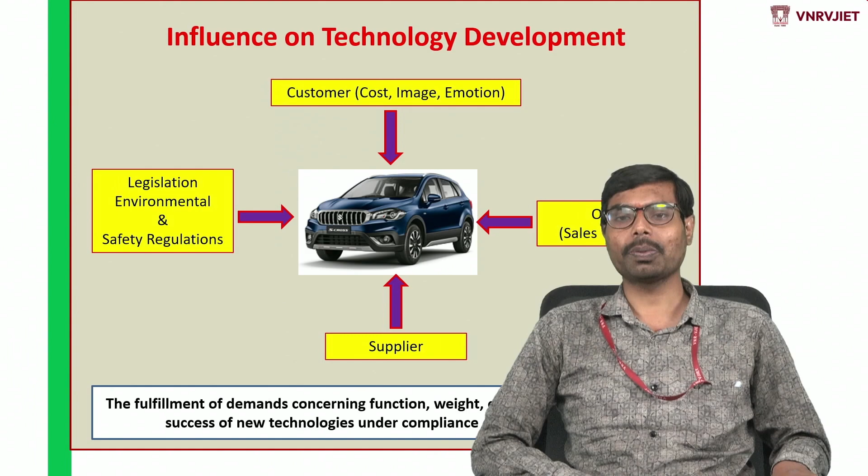So in the last session, we discussed the topic Introduction to Modern Automotive Technologies, where I covered why we need advanced technology, or what is the need for the adoption of technology into the vehicle, and what are the parameters driving the incorporation of technology into the

vehicle. So as we discussed, the basic parameters are drivetrain technology, chassis technology, interior technology, and body technology, the places where we can improve or adopt technology for better comfort, as well as safety, as well as to meet government regulations. These are the driving factors which force technology development.

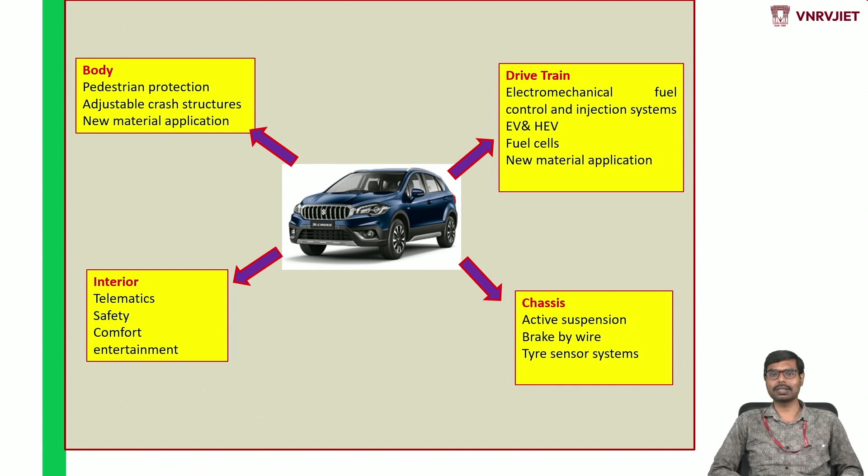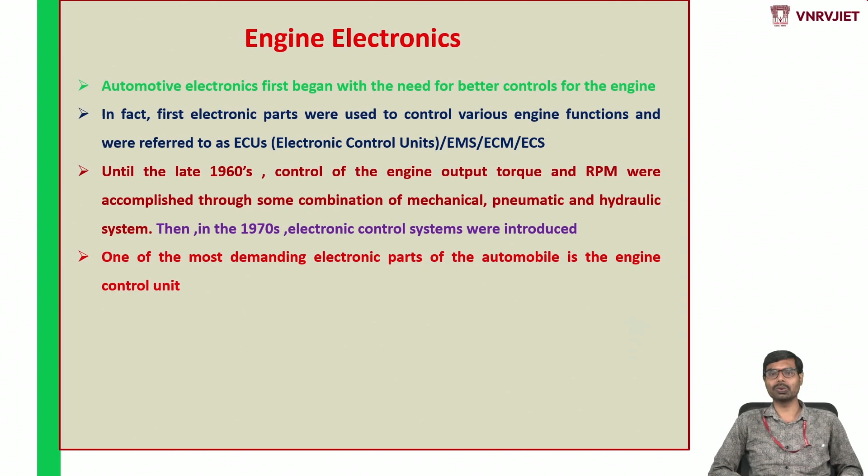Based on that, we identified the four places, that is drivetrain, chassis, interior, and body, where technology adoption was discussed elaborately in the last class. And we also gave some introduction about engine electronics, what is open loop, what is closed loop, what is the percentage of these electronic components inside the vehicle, and what is the cost associated with that.

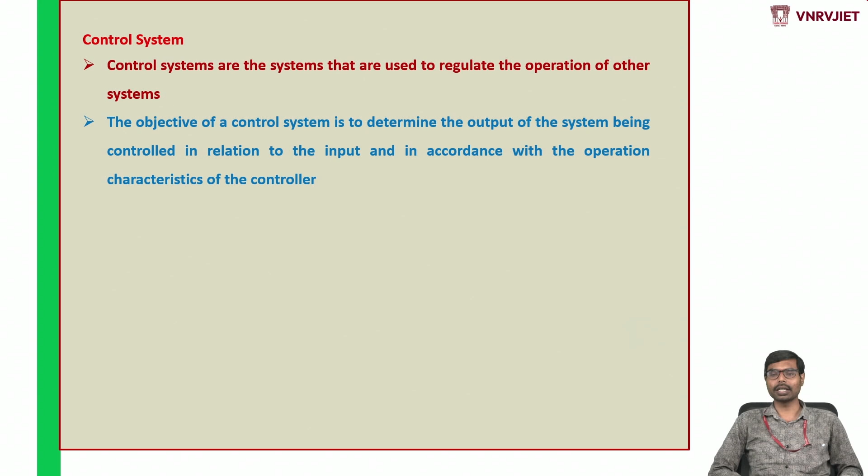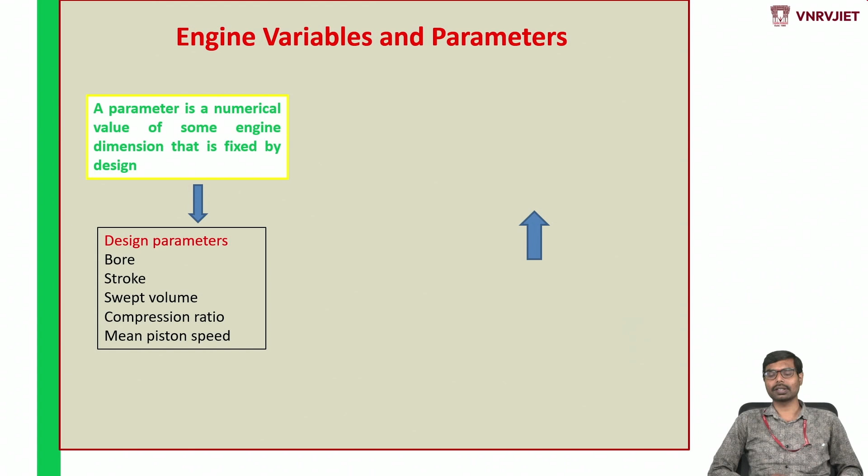So those parts we covered in the last session, and in today's session we are going to discuss some of the important things related to the SI engine management system, that is the spark ignition engine management system. So these are the overview we covered, what are the engine variables and parameters. With the help of electronic engine control, we are able to change the variables, not the parameters. The parameters are fixed during the engine design itself.

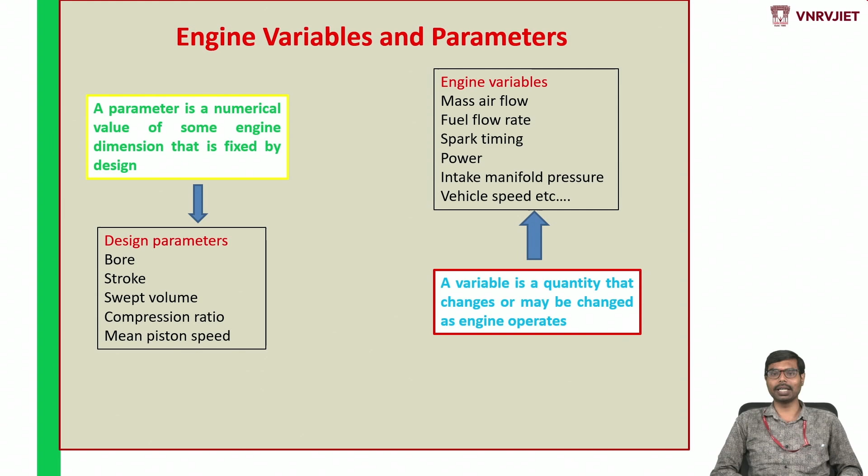These variables we control through inputs and outputs; in relation to the outputs we can control the inputs, so that we get maximum fuel economy and minimum emissions. That part we discussed in the last session. So in today's session, we are going to discuss the engine management system. We also gave some introduction to the basic purpose of the engine

management system. It is basically responsible for controlling the amount of fuel being injected and for adjusting the engine ignition timing. This is the basic purpose and motto of introducing the engine management system inside a vehicle. So the basic intention is that once we control the fuel amount optimally, it ensures minimum emissions and maximum fuel economy.

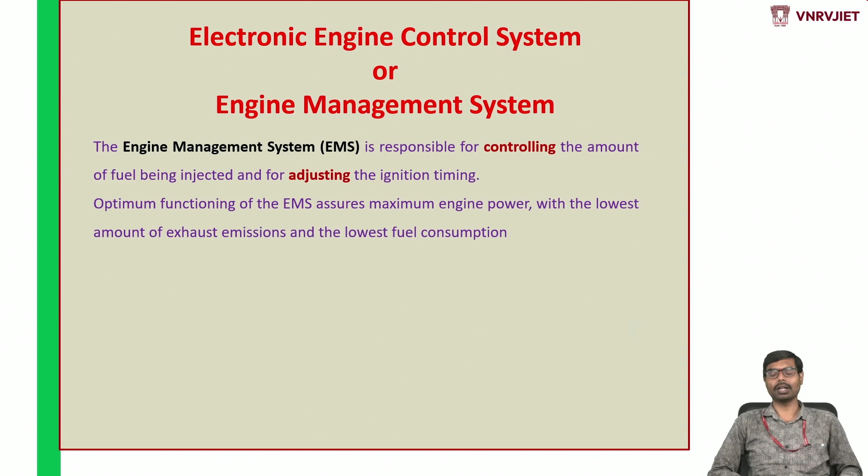That's why the optimum functioning of EMS ensures maximum engine power with the lowest exhaust gas emissions and lowest fuel consumption. In order to get this objective, we are introducing the engine management system. The two functions we discussed in the last class are the role of the engine management system, and these are the parts.

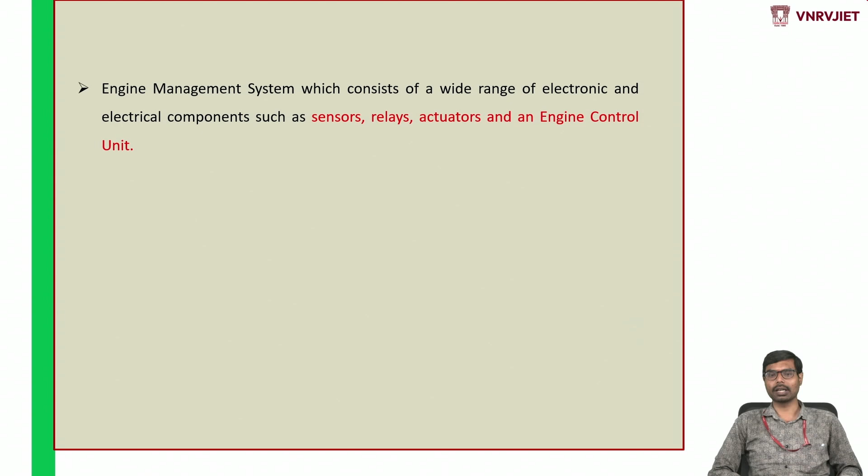An engine management system is divided into three categories, that is the input section, the control unit section, and the output section. The input section is basically the sensors; there are various types of sensors depending upon the kind of system we are dealing with, where a sufficient number of inputs are needed for analysis in the control unit.

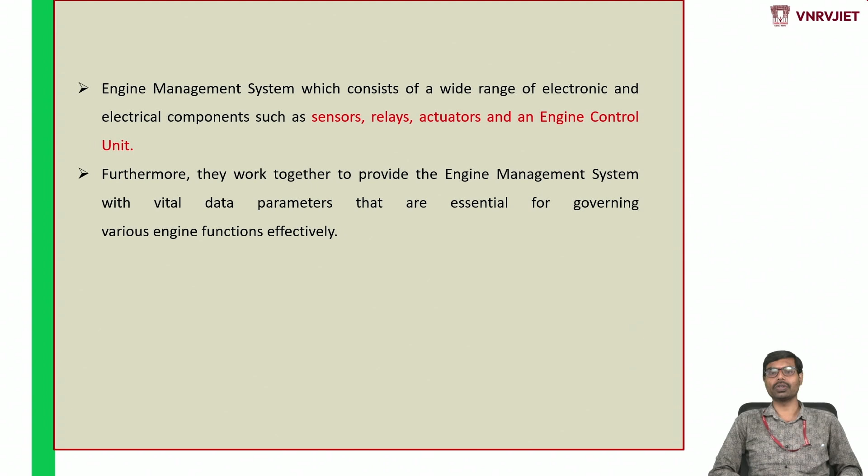The control unit is basically the brain of this control system, that is the engine electronic control unit. Based on these input parameters, the output is regulated; for whatever output we need, we monitor the inputs, so that we get an input-output relation that drives maximum fuel economy and minimum emissions, taking an engine as an example.

Okay. So the different engine management systems are MPFI, that is the multi-point fuel injection system, the gasoline direct injection system, and the CRDI system. These are the most common technologies available in the current market. These systems are developed to achieve maximum fuel economy, minimum emissions, and maximum power output. In order to achieve these three things, we adopted these three technologies.

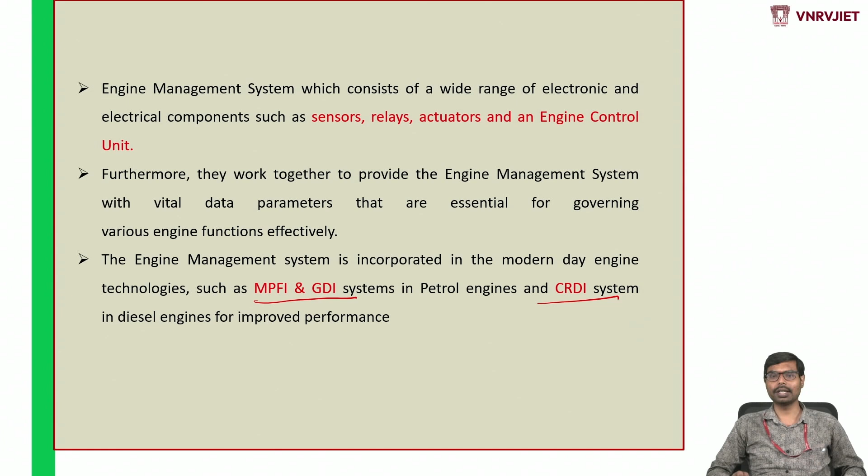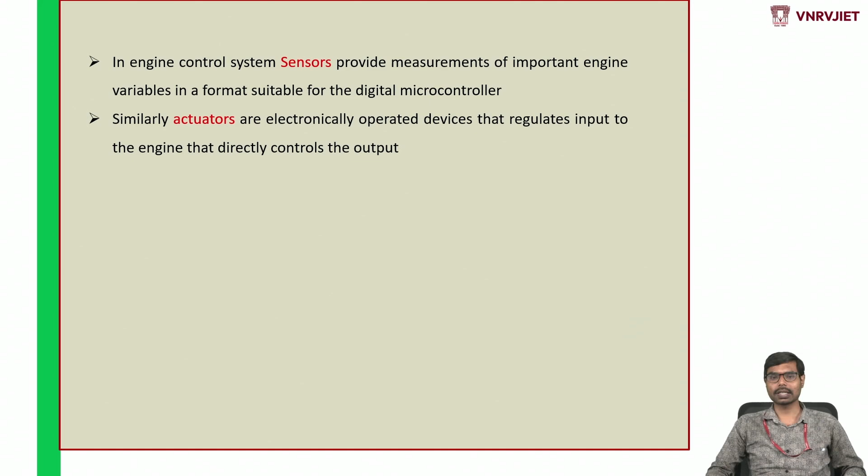If you take any of these technologies, either MPFI or GDI or CRDI, common rail direct injection system, the basic structure of these systems is the same. Only the operating conditions and the architecture are different, but the control system is the same. So how will this control system be? These are the sensors and what they do, the actuators and what they do, and the control unit. This part also we discussed in the last session.

We can play in terms of variables, the variables which we mentioned, like mass flow rate of air, or maybe mass flow rate of fuel, and ignition timing. So these are the variables. With these we can play. So in order to operate an SI engine management system, as we discussed at the start of this session, we have input parameters and output parameters. In between them we have a control system. So here there are n number of sensors which are the input parameters for an SI engine management system.

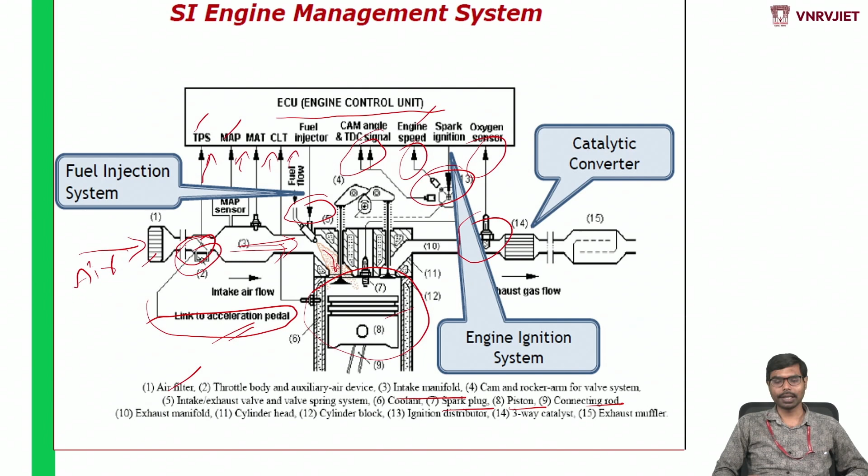The same structure I will explain through a block diagram of the SI engine management system. From this you can understand the number of sensors. This varies from manufacturer to manufacturer, but in a general way, first is the throttle position. When you press the accelerator pedal, the throttle will be open. So at what position is the throttle open?

When you press the throttle, the air from the atmosphere, through the air filter, enters into the intake manifold, where I can understand mass airflow through the manifold air pressure and manifold air temperature. Based on those two sensor inputs, the ECU may calculate the mass airflow. Then manifold absolute pressure, engine speed, cam position, that is the TDC signal position, engine coolant, and exhaust gas oxygen.

All these sensors give the information to the ECU at pinpoint time, continuously monitoring every second or even every microsecond. The ECU analyzes the information from these sensors and gives it to the actuators: fuel metering, that is your fuel injector controller, and ignition timing, the ignition system. It may be a magneto ignition system or an electronic ignition system, any kind of ignition system.

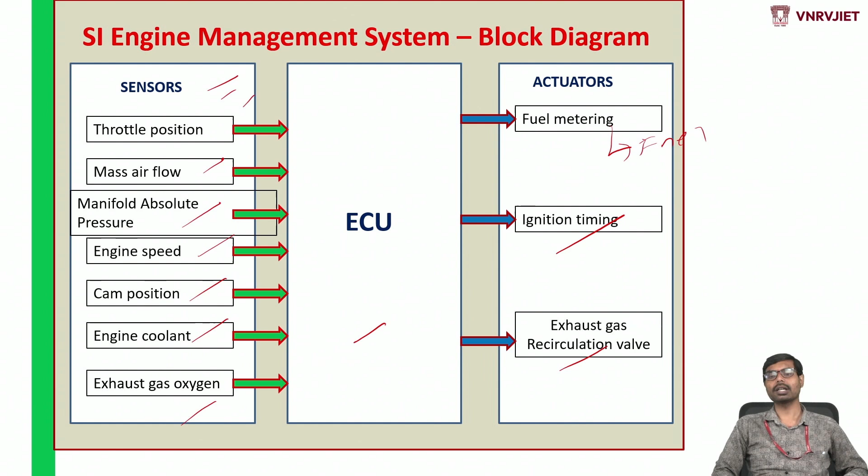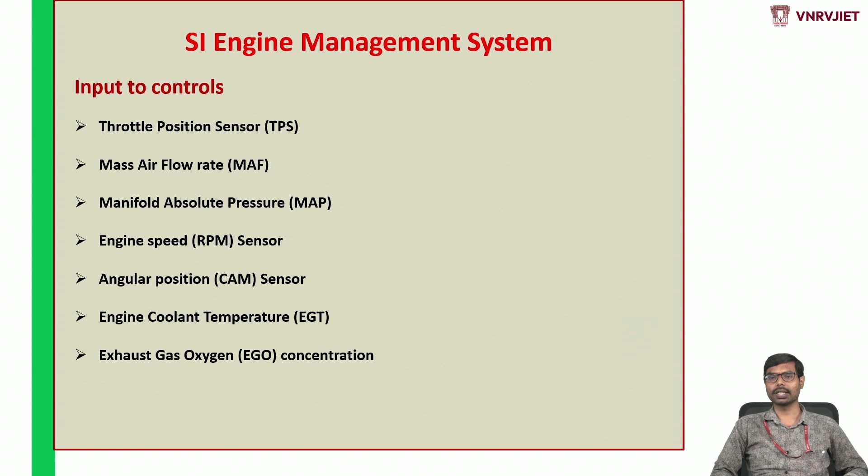And the exhaust gas recirculation valve is another controller. With this kind of latest technology, some exhaust gas will be recirculated for better combustion, to get maximum output with minimum emissions. And further, the inputs to the controllers are mass airflow rate, manifold absolute pressure, throttle position sensor, engine speed, angular position cam sensor, engine coolant sensor, and exhaust gas oxygen concentration.

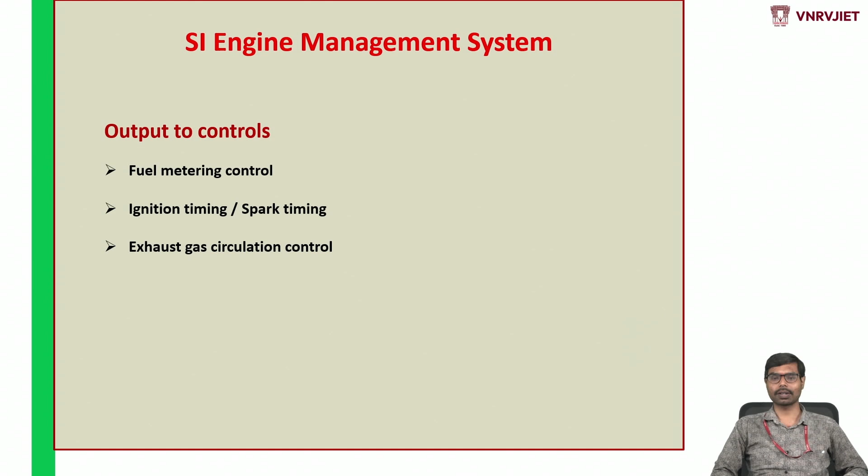And the output to the controllers, as we discussed: fuel metering, that is fuel metering control, that is fuel injector control, and ignition timing and spark timing, that is electronic or maybe conventional ignition systems, and exhaust gas recirculation. And if you see the working, the same things I mentioned in the picture, I quoted in terms of the statements, we will see.

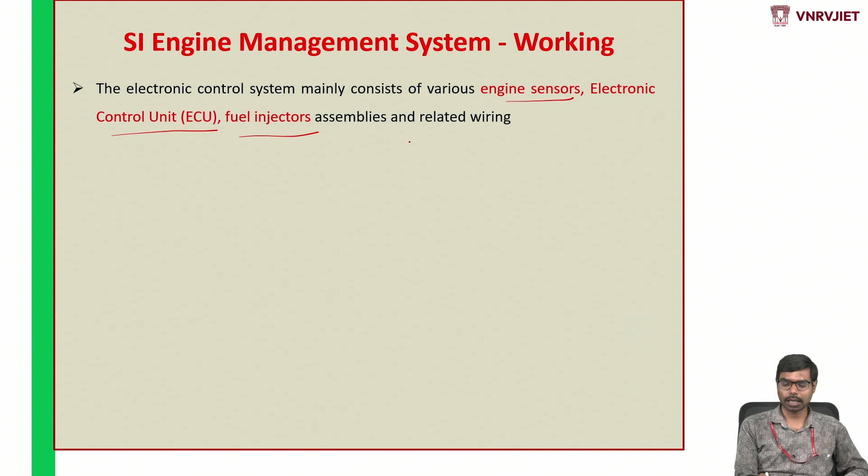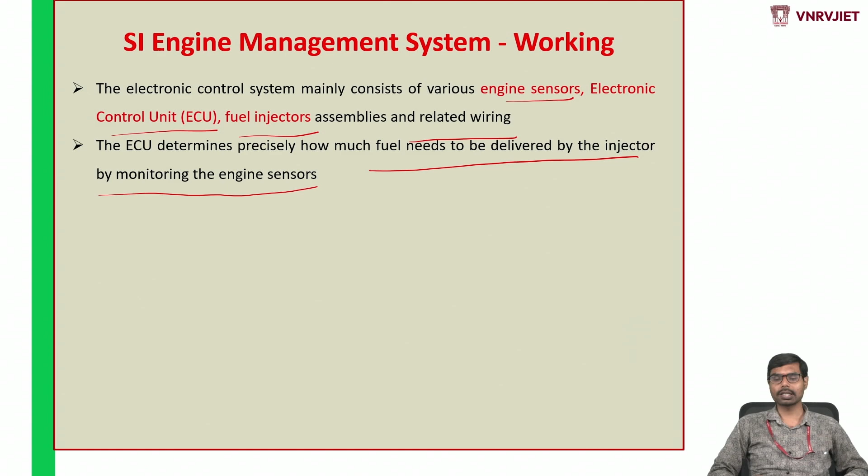So the electronic control system mainly consists of engine sensors as an input, an electronic control unit, and fuel injectors. The fuel injectors are the outputs, that is actuators, with assemblies and related wiring for transfer of the information from sensors to the ECU, and ECU to the actuators. And the ECU determines how much fuel needs to be delivered by the injector by monitoring the engine sensors. That is, based on the different engine sensors, it will analyze the information and calculate how much amount of fuel I need to supply to the engine.

So how is this precisely determined by the ECU? The position of the throttle plate is sensed by the throttle position sensor, which directly regulates the airflow to the engine, thereby controlling the power output, as we mentioned already. So air enters the air induction system, where it is measured by the airflow meter in terms of volume, or maybe in terms of pressure, or maybe temperature. This method is called direct mass flow air measurement.

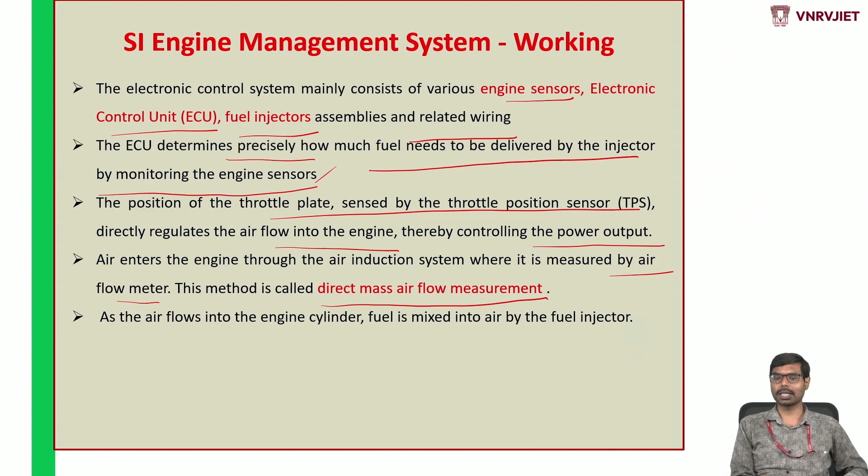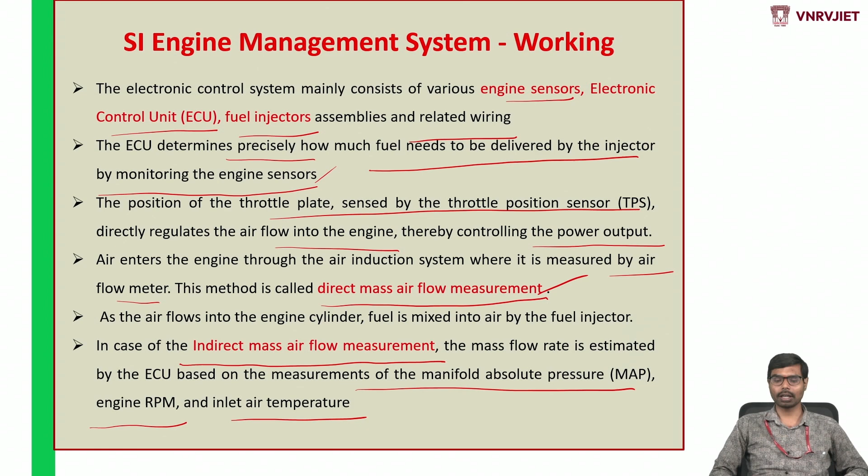So if there is any mass airflow sensor, or maybe volume airflow sensor, directly kept in the passage of the engine manifold, then it is called direct mass flow measurement. Right now we are not using this; we are using only indirect measurement, that is based on the measurement of manifold absolute pressure, engine RPM and inlet air temperature. This will give precise information to the ECU in terms of at what flow rate and at what density the air is entering. This method, which we use nowadays, is called indirect mass airflow measurement. The direct mass flow air measurement was initially used as one of the technologies, but now instead of directly measuring the volume flow and the mass flow, we are taking the indirect measurement.

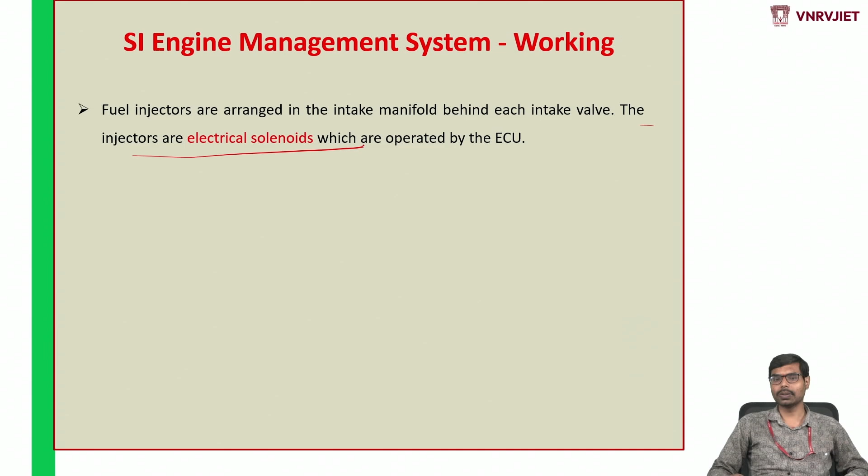So based on this, fuel injectors are arranged in the intake manifold behind the intake valve. These will get the information from the ECU on how much quantity of fuel they have to inject. They are operated with electrical solenoids which are operated by the ECU. And the ECU pulses the injector by switching the injector ground circuit on and off. So the ECU communicates how much time the injector has to be open, and based on that, the injector solenoids start giving the injection in terms of pulses.

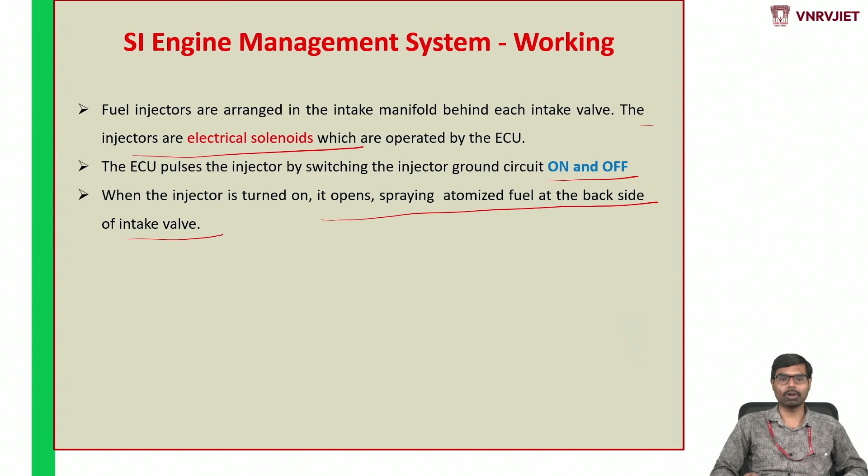The pulses have a frequency, how many times per second I need to open it, maybe 200 times or 300 times, and each pulse gives some amount of injection of the fuel. When the injector is turned on, it opens and sprays the atomized fuel at the backside of the intake valve. Once sprayed, it mixes with the incoming air and vaporizes due to the low pressure in the intake manifold. As we know, for an SI engine management system we need homogeneous air and fuel. When you are supplying a homogeneous air and fuel mixture, then we will get maximum power output.

Before that, you need to remember one thing: the engine needs air and fuel. The air is in a gaseous state, but the fuel, if you take petrol, is in a liquid state. So there is a difference in the phases of the two fluids. That means we need to convert the petrol into the gaseous form as soon as possible before entering the engine, so that we will have sufficient time for mixing of air and fuel, so that we will get maximum power output, or maximum conversion of the fuel into power. Otherwise, if we are not able to mix this fuel and air properly before entering the engine, the conversion will decrease.

To avoid that, we have to blend or mix the fuel in a 100% homogeneous manner before entering into the engine. That is possible when you inject the fuel with high pressure. When you inject the fuel with a high pressure, it is atomized very fast and converted into a gaseous form, that is vaporized due to the low pressure in the intake manifold.

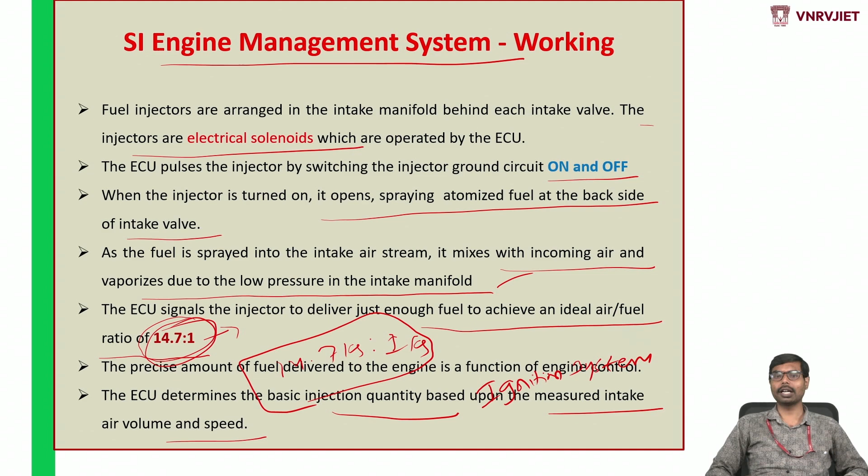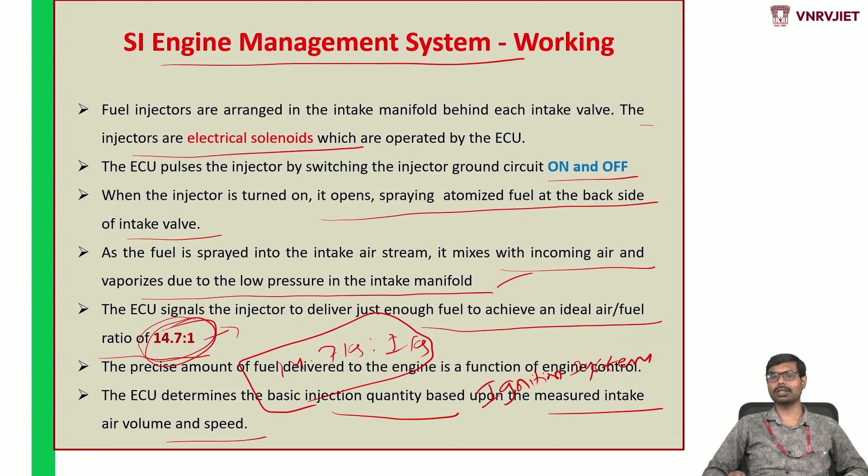When you open the throttle 100%, it means the driver intends to go at high speed, or wants to overcome a large load on the road, so the ECU will instruct the injector to supply more fuel. Clear? So depending upon engine operating conditions, the injection quantity will vary. The ECU monitors variables such as temperature, engine RPM, throttle angle, and exhaust oxygen content, and makes corrections which determine the final fuel quantity.

For example, for 2 minutes I open the throttle valve 100%. Somehow I overcome the load, or I want to reduce my speed. So I will release my leg on the accelerator pedal, so that the throttle position comes from 100 to 50%.

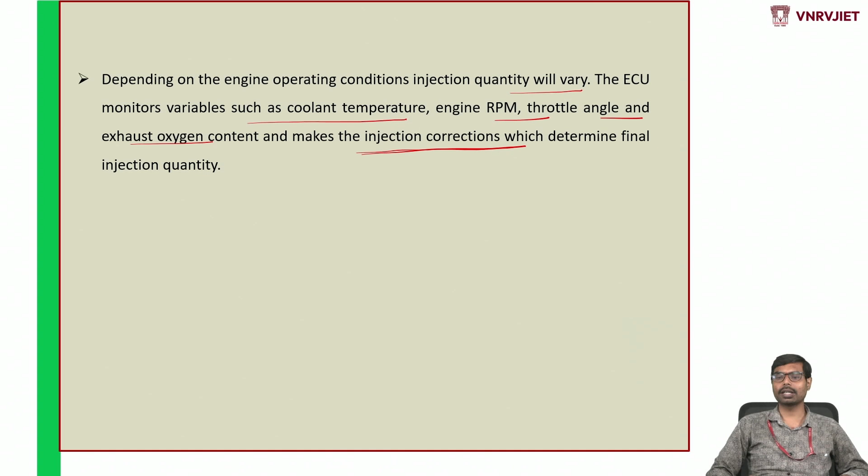At that time the ECU will understand the throttle position came to 50%, then it will adjust the injection correction, so that it can adjust the injection timing, at what time I need to inject, how long I need to inject, and what quantity of fuel I need to inject. So based on these inputs, such as coolant temperature, it will do it.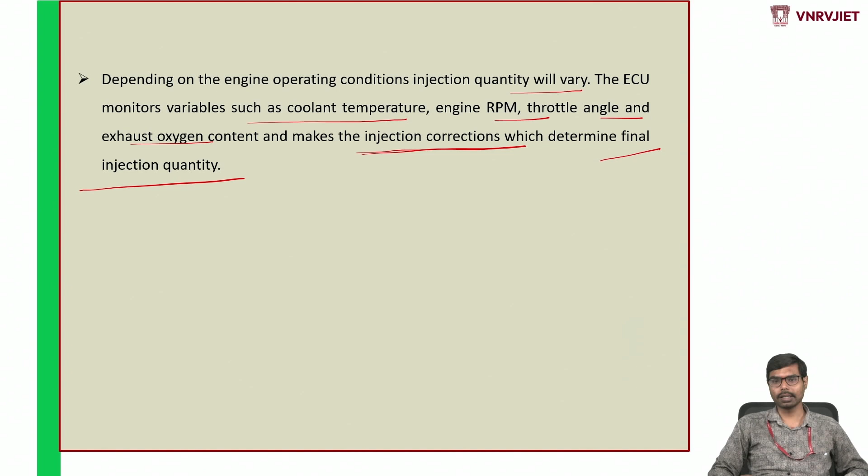That's the basic thing. The next session will be about what kind of sensors are present inside this engine management system, how they work, what basic sensors are available, and what the basic working principle behind them is. We will discuss those sensors in the next session. Thank you.